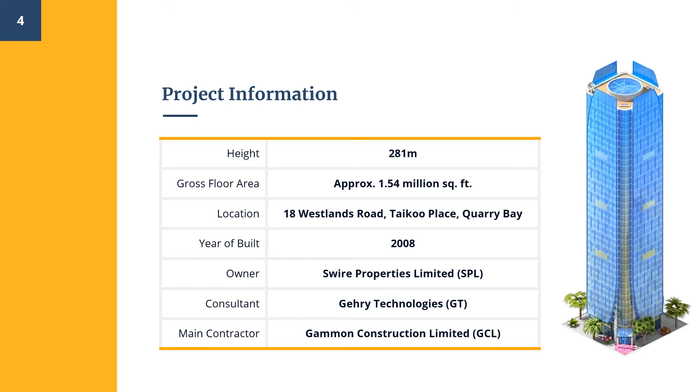One Island East is a Grade A office building located in Quarry Bay. Throughout its construction life cycle, all the parties involved were required to make use of Digital Project, a software to create the building information model. The result is significant. The project was completed quicker, cheaper, and better than expected.

BIM has been adopted in mainly two stages, the design stage and construction stage. In the project, BIM serves three major functions, which are visualization, file sharing, and interoperability of information.

For visualization, BIM helps to visualize the whole structure in a three-dimensional model in the design and construction stage. All the stakeholders can have a clear understanding of the building structure. Therefore, it could facilitate communication and hence reduce misunderstanding between parties. Besides, contractors are able to submit a more reasonable bid based on the distinct tender documents and working procedures.

In regard to file sharing, project-related parties are able to develop and share BIM models over the Internet during the design and construction stage. They can access the files and collaborate together in the virtual project office at any time and anywhere. Also, hyperlinks connecting to individuals, manufacturers, or design teams are contained for each element, which enable instant collaboration as well.

For interoperability of information, simply speaking, BIM connects 2D information such as paper drawings, Excel spreadsheets, and construction schedules with the 3D model. This saves time and reduces manual error when professionals interpret the data. It could also ensure consistency between all documents.

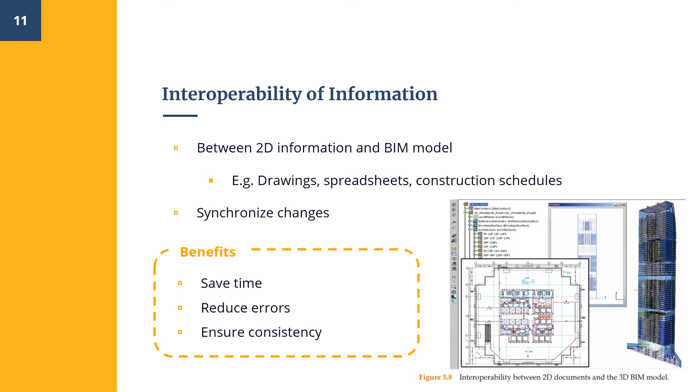Apart from the general application of BIM, it also contributes in the design stage specifically by automatic quantity takeoff and clash detection. The BIM model could generate quantities according to the HKIS format. The information of quantities is so detailed that it includes its specification, dimensions, and lists in a proper and clean format. In addition, the material schedules can be updated automatically when the design changes. As a result, cost consultants are able to estimate material costs accurately in a shorter time.

In addition, the built-in clash detection function of BIM allows physical design conflicts to be discovered in the design stage. In this project, around 2,000 clashes were identified and resolved before tendering. This function prevents consequential loss in time and materials caused by the late discovery of clashes.

BIM also helps in the construction stage by construction sequence modeling and on-site information provision. Construction sequence modeling greatly enhances the effectiveness of the construction process. It provides construction sequencing with work breakdown structures and could illustrate construction schedules with time frames. Moreover, it could compare different construction sequences and methodologies. Therefore, contractors could understand the time required for alternatives, allowing better trade coordination.

As mentioned, the model also provides sufficient on-site information for various types of workers. For instance, the location of works, material use, and dimension of building elements. Workers could understand this information easily and prevent misunderstanding, thus minimizing the possibility of rework.

In general, there are three major benefits of adopting BIM in a project as reflected in the case study. Reduction of project time is achieved by three aspects of BIM adoption. Construction time can be shortened as clashes can be detected before the commencement of the construction stage. Secondly, the optimal path in fulfilling the project requirements is revealed through the 3D simulation of BIM. In addition, the integrated database reduces communication time between various parties with this co-working space.

The third benefit is risk reduction. In this case, more than 2,000 clashes were successfully located. Besides, an integrated user interface of the application can also facilitate coordination between different parties and avoid future claims. At the same time, the accurate tender price estimation by the modeling can be a useful means of avoiding disputes related to project costs.

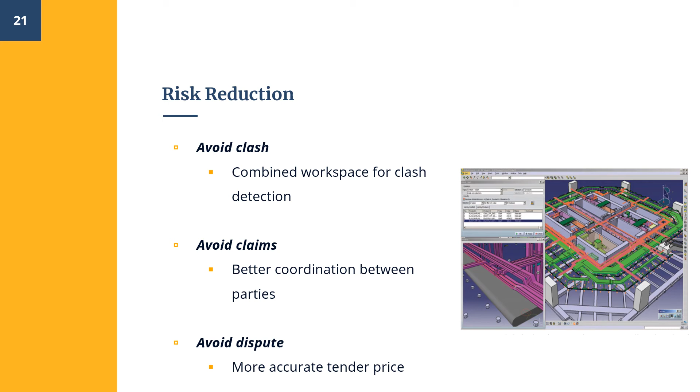Despite the advantages of BIM adoption in the project, there are still some limitations of the implementation. For the control and authority of information, disputes could arise on whether the clients or the contractors own different data of the model, as it is a valuable resource for upcoming projects. Moreover, mistakes made in data collection will have a huge influence on the project. Without proper negotiation of the responsibility prior to the commencement of the project, disputes may arise frequently.

BIM development may not be very mature currently. Regarding the virtual prototyping education system nowadays, there are insufficient reference materials in the market, which results in a low number of skilled manpower available. Also, the choice of suitable contractors will be limited. This reduces clients' willingness to adopt BIM for new projects.

After evaluating the BIM adoption in the project, a few suggestions will be given. Regarding the One Island East project, BIM is suggested for use in the operation and maintenance stage as well. Building information can be obtained and a maintenance schedule can be created. Similar to other stages, components requiring maintenance can be located easily, and the annual cost can be estimated conveniently.

For the future implementation of BIM, standardization is encouraged. Currently, many problems occur due to the lack of a common language for information sharing through BIM. With a standard and a guideline, a consistent presentation format can be formed, just like the one provided by the EMSD to regulate related BIM submissions. As a result, misunderstanding can be avoided and processing of mass information facilitated.

So this is all we want to share about One Island East and BIM implementation.